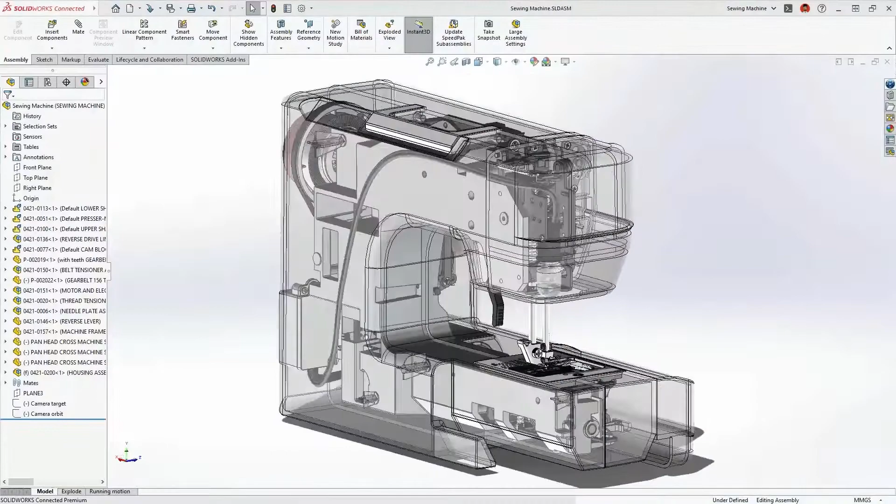As a SOLIDWORKS user, you expect the best out of your software when it comes to customization, performance, and working with others. SOLIDWORKS 2023 significantly improves the user experience. Communicating with your team on a project is vital to success, and a great way to do this is through comments. In SOLIDWORKS 2023, comments are enhanced to improve usability.

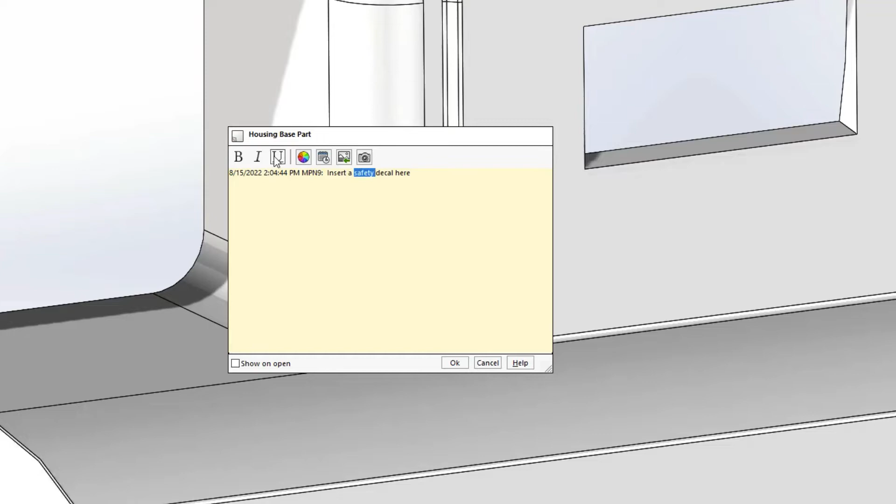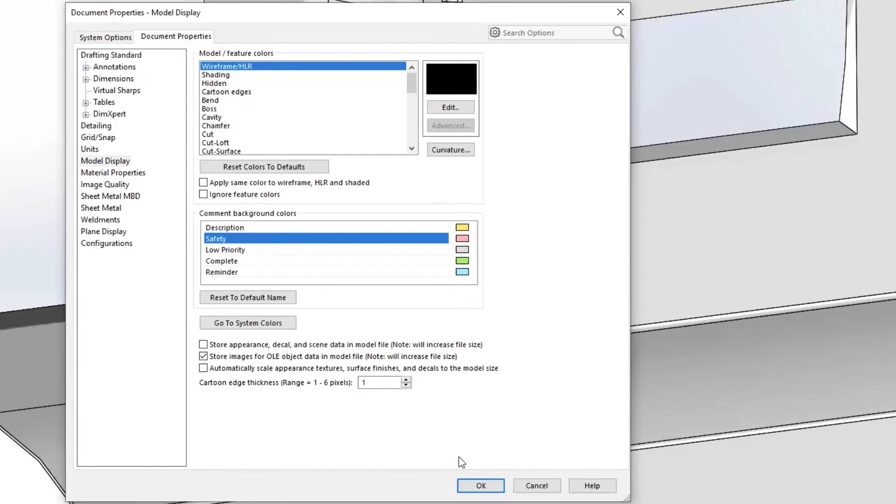You can now emphasize text using the bold, italic, or underline modifiers. Adding a screenshot to the comment is just a click away. You can add images from your local machine to give your comment even more context. The background color can be changed as well, so others understand the priority at a glance. These labels can, of course, be customized to add even more clarity. If a comment is critical, you can set them to appear when the document is open.

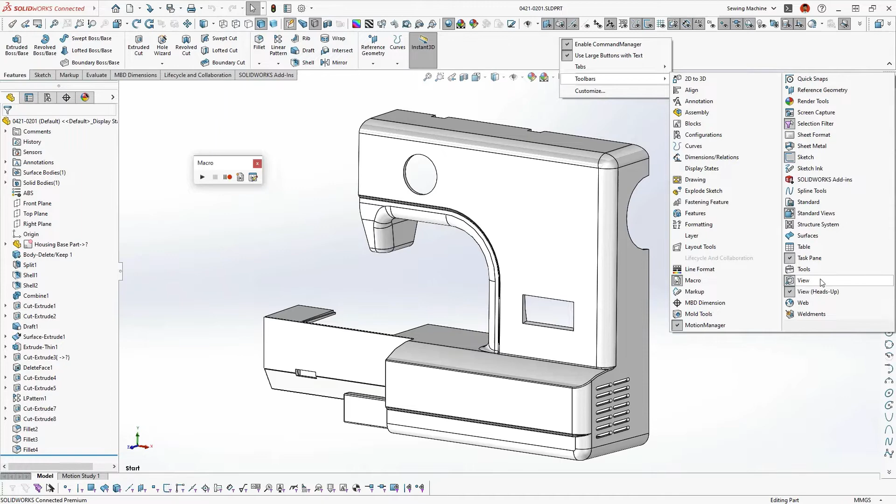It's no secret that SOLIDWORKS has the most customizable interface of any CAD application. Have you customized too much? Or maybe you just want a fresh start. You can now more easily restore the default settings in SOLIDWORKS 2023. Each tab of the customize window has a Reset to Defaults button that allows you to reset that specific tab setting, the command manager, or all customizations.

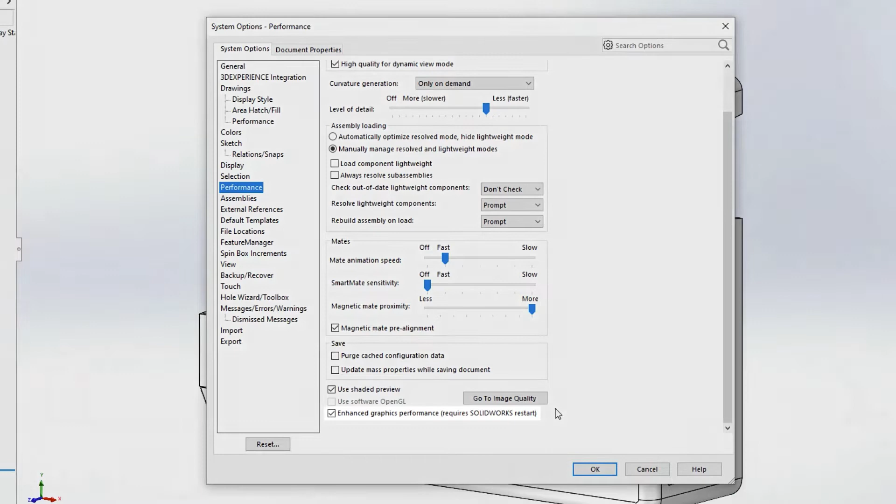And of course, we have to talk about performance. The render system, released in 2019 to improve frame rates during pan, zoom, and rotate, has been dramatically optimized. We listened to user feedback and resolved many issues. You'll now have greater reliability with the Enhanced Graphics Performance box checked, so that you can realize the faster frame rates when viewing large assemblies or parts with complex geometry.

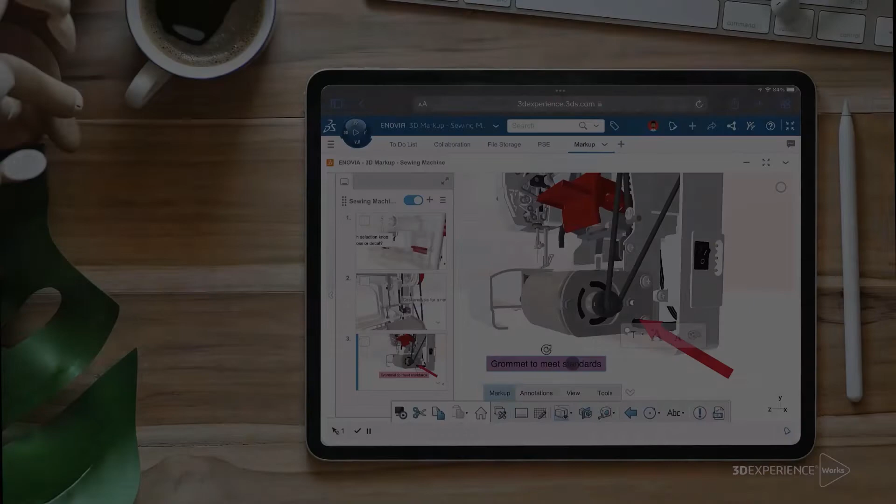A better user experience means improved productivity. Customizing the user interface, communicating effectively, and improving frame rates allows you and your team to speed through your designs. Communicating with your team becomes even more effective when storing your data on the 3DEXPERIENCE platform. All credentialed stakeholders have access to view content and can even make markups using any device with an internet connection. These markups are stored with the data and shared directly, so the right person has access to the right data at the right time.